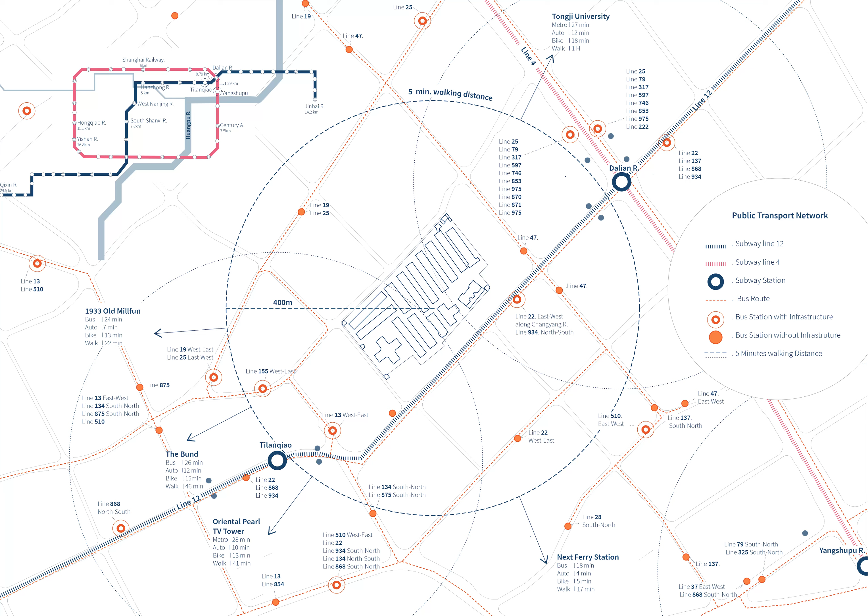An analysis of the urban context in the area of the Ward Road Jail highlights the position and relation of the site towards the city. In terms of connectivity and public transport infrastructure, it is well integrated into Shanghai's system, making the area reachable, though that doesn't mean it is frequently visited.

The streets next to the Ward Road Jail are livable streets where pedestrians are visible, even though the infrastructure of the sidewalks may not be the best. Obstacles on the streets, mainly daily use items such as bicycles, scooters, clothes, and chairs, are present.

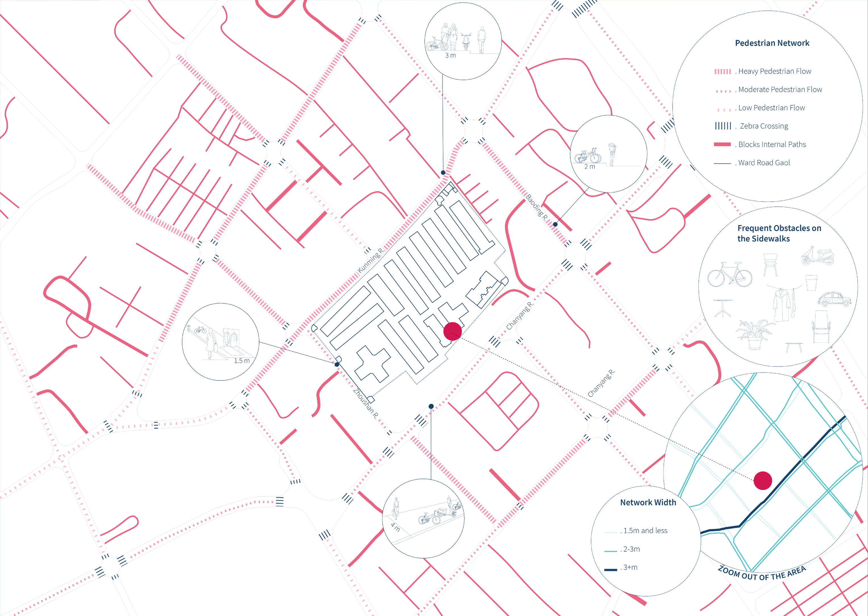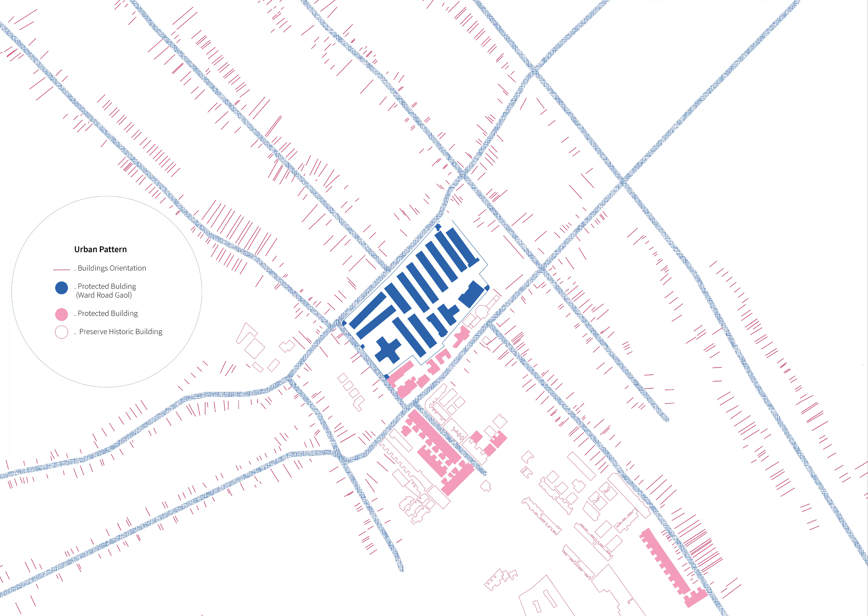With many street-side oriented facades, the zone is livable and inhomogeneous, revealing that the streets and the built environment remain in a strong coexistence. This relationship offers an urban image where the daily life of the inhabitants could be perceived, making the district very unique. The block's size is revealing the history and development of the city, creating different urban forms.

In the area, residential use is present in different typologies, even though the inhabitants live in very, very small spaces and are forced to build improvised rooms for cooking or storage.

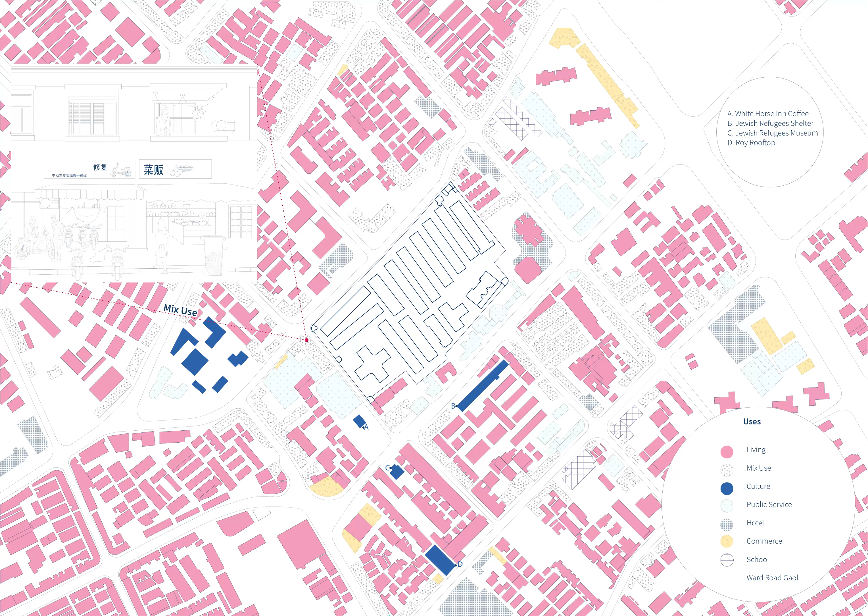Also, in order to achieve some sort of economic development, a mixed working-living use is very predominant in the area, creating an almost monotonous functional layer.

As the history of the area was marked by industrialization and high density populations such as refugees or workers living there, the space for green areas was very limited or almost nonexistent, and nowadays the panorama is not much different.

The low rise pattern endorses the historic appearance, with a predominant height in the zone from 5 to 15 meters, because of its history as a workers' neighborhood, giving the area a distinctive character and shaping the community.

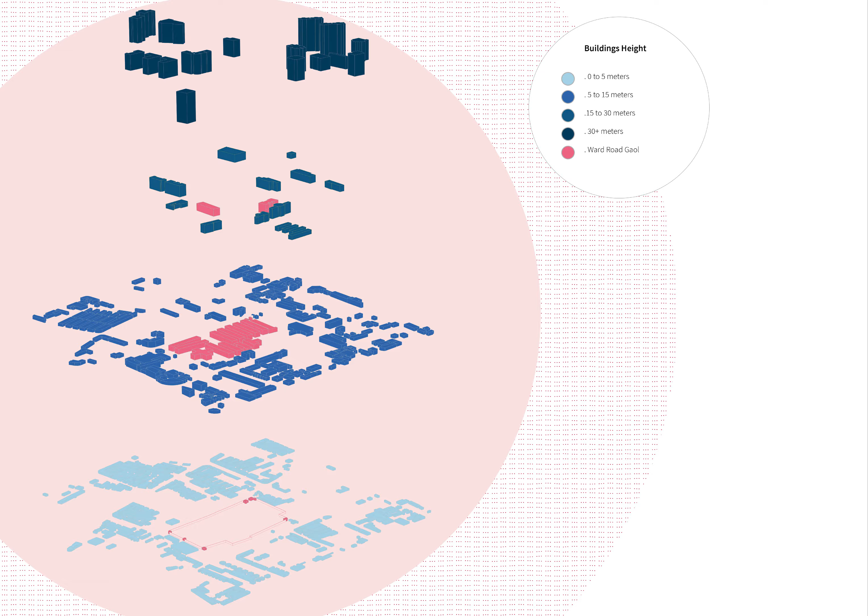According to historical maps comparison, Tilanqiao has not been subject to demolition, more than some small parts in order to improve the street network. And since the area was declared a historic area, the probability of some drastic demolitions is lower. But as represented in the graphic, this is not the case in the surroundings.

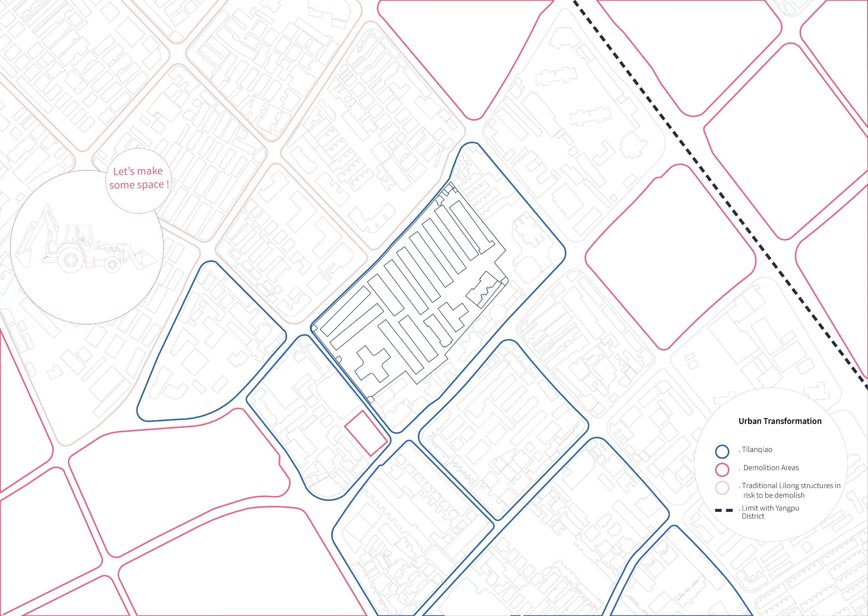On the west, entire blocks, most of them containing traditional structures, have been demolished.

Therefore, to break with the terror meaning of its use on architecture in order to heal a society may be considered as a hard goal to reach.

The Ward Road Jail is presented as a cultural good, but nowadays the only interaction that visitors may have with the buildings is just visual. The strong impermeability around the complex, endured by its massiveness and authority character with elements like CCTV or barbed wire, makes of it a place to contemplate and not a place to experience.

For obvious reasons, the use of the Ward Road Jail prevents any interaction between the complex and outside users. Also, how we imagine prisons has nothing to do with how we imagine the spaces where we want to live and coexist. The Ward Road Jail may be interpreted as a barrier, not only enclosing almost the whole block and avoiding any public alley system inside of it, but also making the sidewalk on its surroundings not appropriate and monotonous, which generates an unpleasant experience for the pedestrians.

Inside the complex, the lack of space is evident, resulting from the needs for expansion of the prison, which led to the construction of different buildings in the spots available.

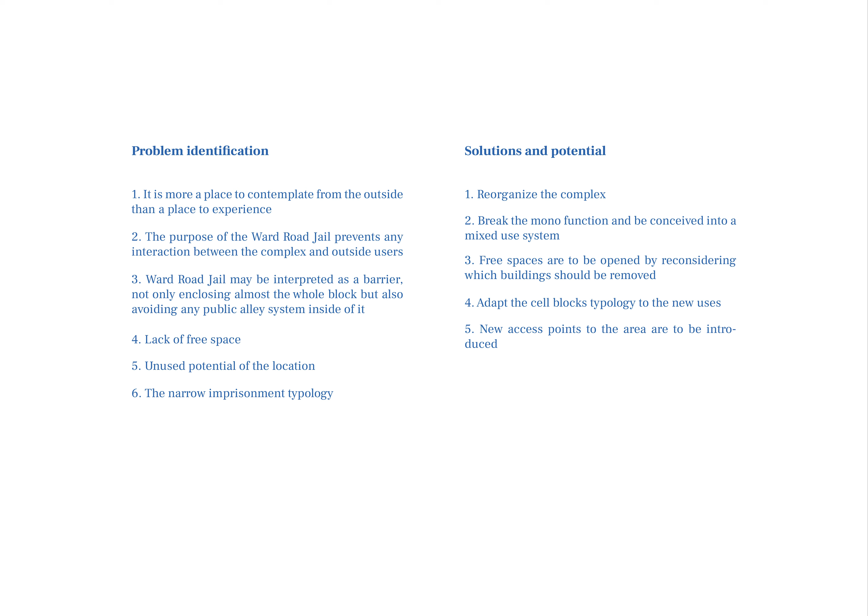New access points to the area are to be introduced in order to create a permeability which will allow a better connection with its surroundings. Inside the complex, the movement patterns are to be changed in order to create stronger connections between the buildings and the open spaces.

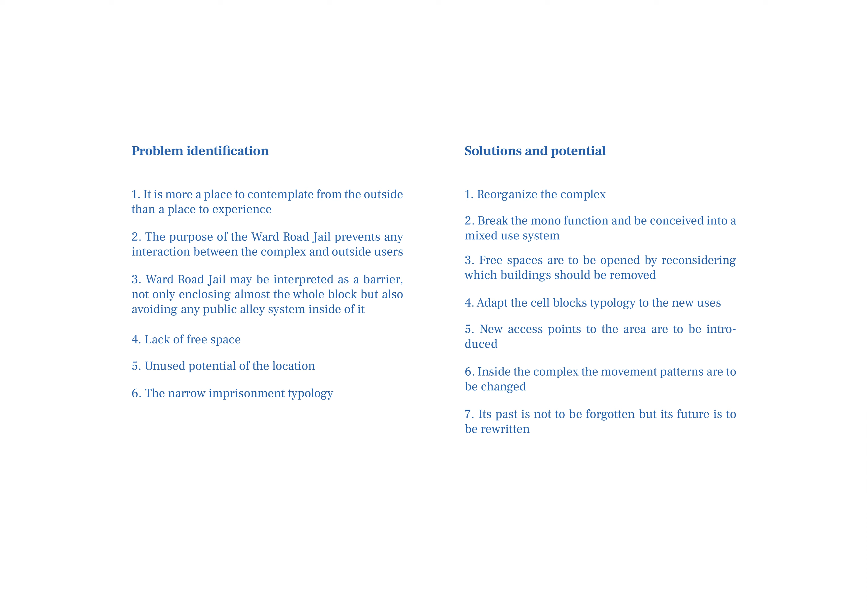Even though, as defined before, prisons are architectural forms of terror, in the case of the Ward Road Jail, it has also an incredible historic value. For this reason, its past is not to be forgotten, but its future is to be rewritten, being an opportunity for the community to reinvent themselves.

From the current situation, the creation of new access and the liberation of space by the demolition of specific buildings offer a new way to experience and connect the area.

The definition of the access allows a new distribution and division of the existing structures and the creation of new spatial qualities. By cutting the existing structures, the access not only redivides the outdoor areas, but also the indoor spaces, creating an intersection between the old and the new.

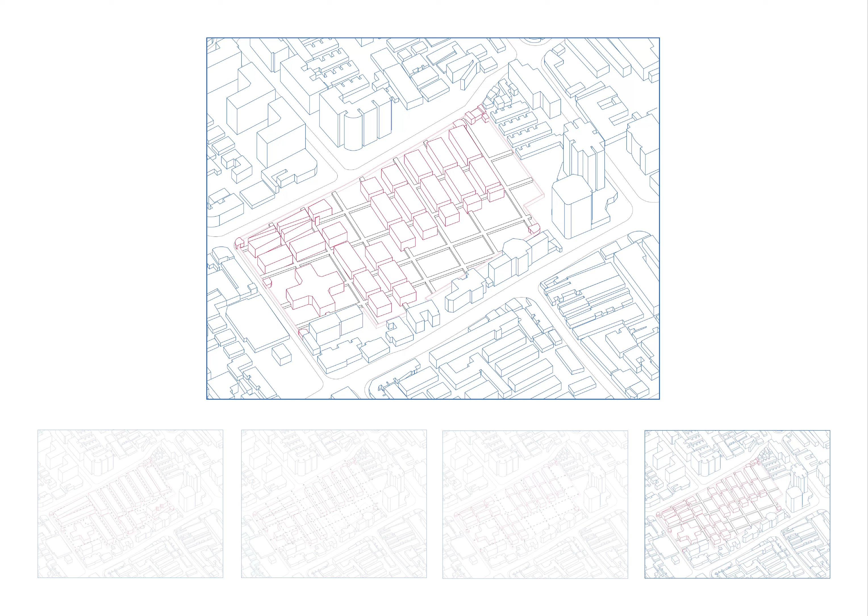The axes are materialized by four different structures that create variable levels of permeability: sitting, framing, connecting, and interacting.

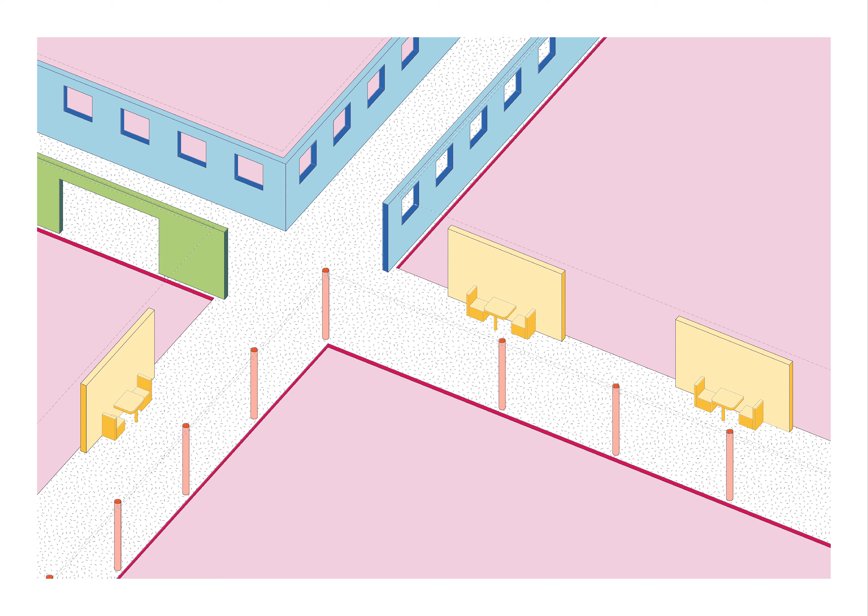Combined together, the different structures offer changing spatial and visual sequences. The axes build a shelter for the visitors, and at the same time, they serve the courtyards.

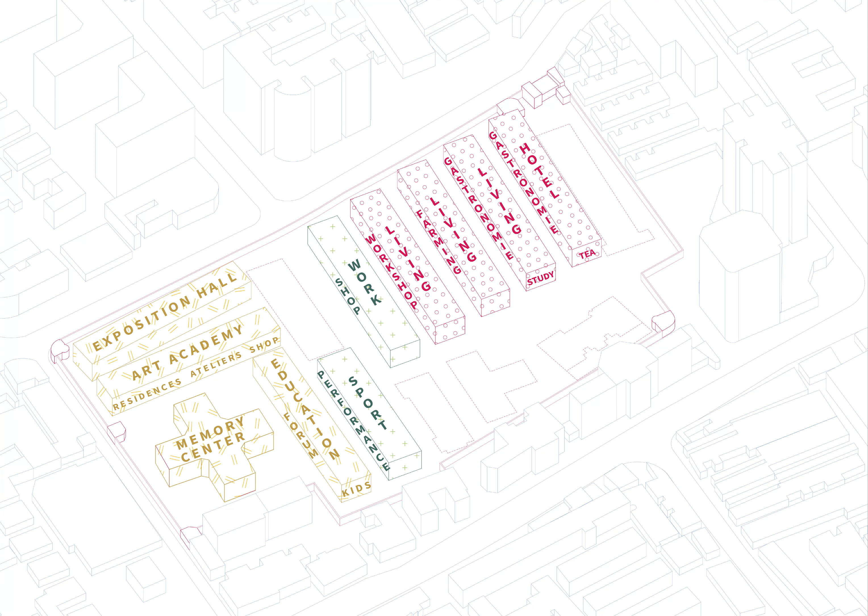The prison typology is by definition not permeable to the city, and its buildings are all designed to work in favor of the prison function, ignoring the community of the area. The mix of uses ensures that the complex will be the meeting point of a colorful group of users.

Because of its use, the detailed floor plans from the prison are not available. Therefore, its current typology has been reconstructed from narration of former inmates. The two lines of cells are located back to back on the center of the block, with an area of 3.2 square meters each cell.

This structure was thought in order to avoid any communication between the inmates, reduce their space to the minimum to allocate more people in less space, and to optimize the monitoring work. The new distribution for the plan is at the same time respecting the existing structure while liberating itself from the restricted arrangement of the prison cells.

From the modification of the existing plans, four main new typologies are created in order to respond to the new functions. The different functions are arranged to react to the surroundings inside and outside the complex. The main axes are accentuated by a system of plazas to generate social urban spaces. They are also activated by livable functions such as commerce and working.

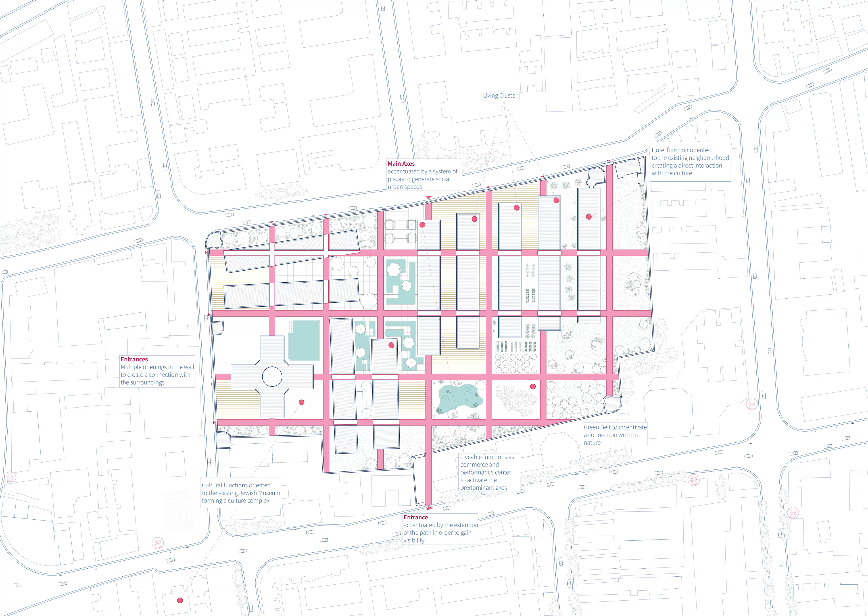The living cluster and hotel are oriented to the neighborhood in its most residential part, allowing direct contact with the daily Chinese life. Cultural functions are oriented to the existing Jewish museum, forming a culture complex.

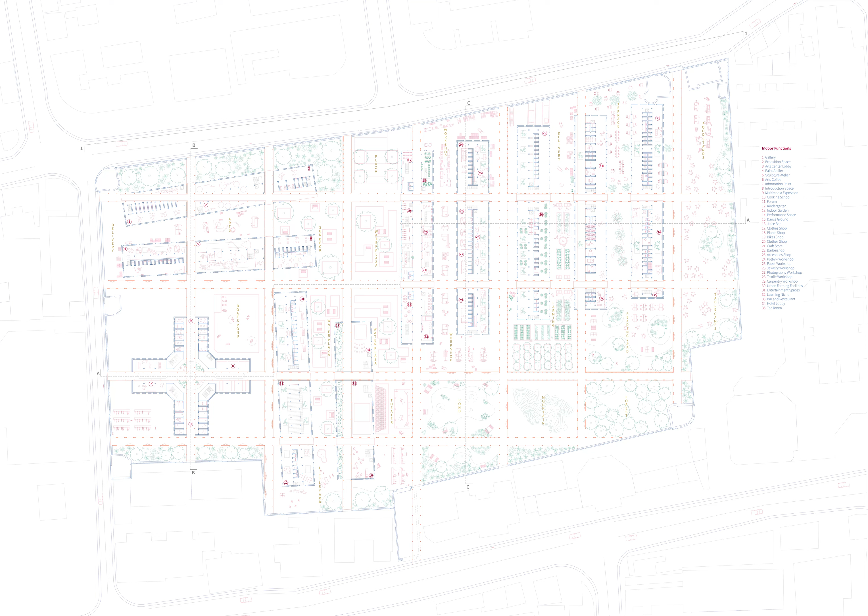The surrounding wall, as a characteristic element of the complex and as a primordial point of contact between the Ward Road jail and its surroundings, will not be demolished, since it may imply the forgetfulness of its history. Therefore, the decision to open it is motivated by the discourse of release that social action means.

The improvements in the permeability of the complex and the integration of it with the surroundings are conceived as an act of reconciliation and negotiation between historic and modern architecture, giving back to the community a piece of land which was kept as an unreachable archipelago.

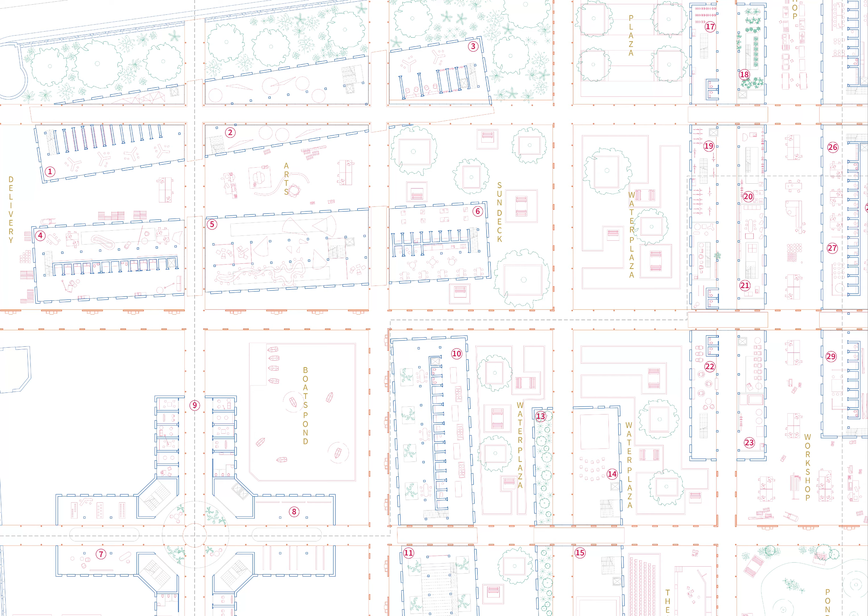Its improved spatial organization will achieve a variety of atmospheres, breaking with the homogeneity present, and resulting in a more human-led composition in which interaction, encounter, and creation are a constant.

The reuse of the Ward Road Jail is a liberating act for a society which has been trapped between the past and the present, with the conception that it was their past which condemned them to not follow the pace of evolution present in the rest of the city, blinding the idea that it is there in their history where their potential and value relies.

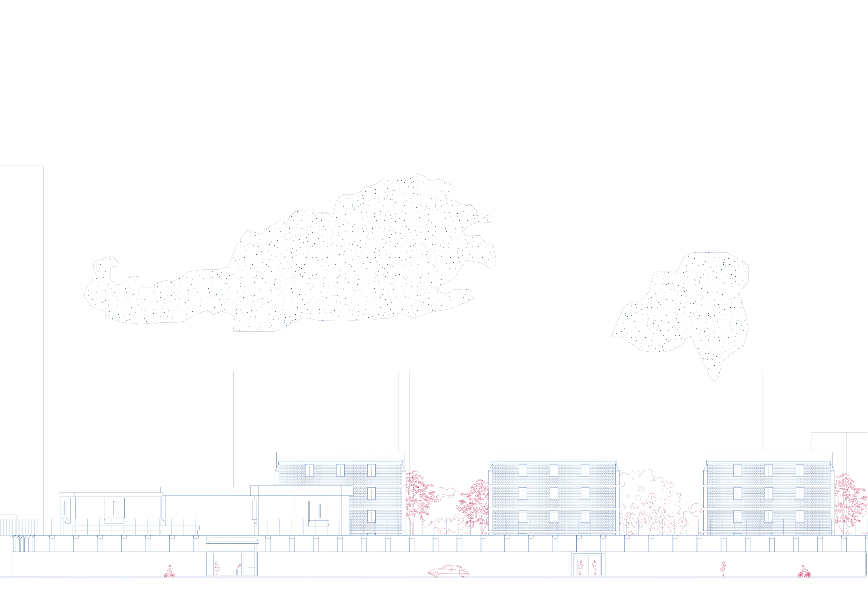Instead of seeing the historic areas as an obstacle and relating them to underdevelopment, modern cities have to consider social areas as contributors of evolution and growth that endure the identity of their inhabitants and as essential parts of their functionality.

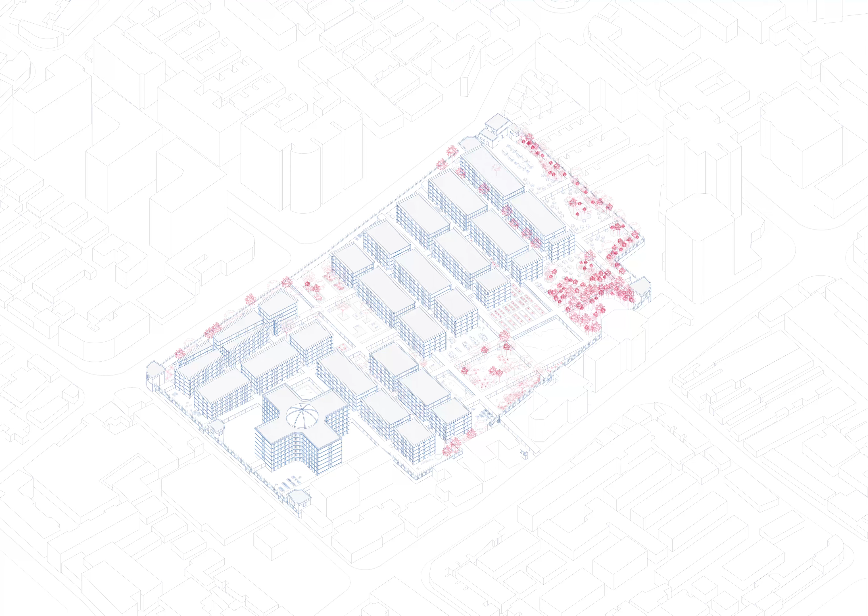In architectural terms, this is highlighted by keeping the forms from the past and at the same time allowing the introduction of new elements, creating a scenario where both remembrance and development can coexist and complement each other.

Remind the community not only who they were, but endure who they are, and improve who they are going to be.